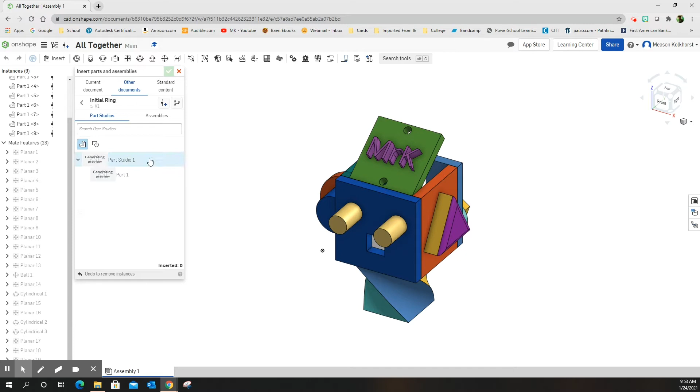Right, we're going to put the ring around our initials. So insert other, my Onshape, fancy cube, initial ring. Create a new version, create.

Part Studio 1, and set him down out there. Green check mark. Okay, so the reason that we left a flat surface on here is so that we could mate it to the flat surface of our top face.

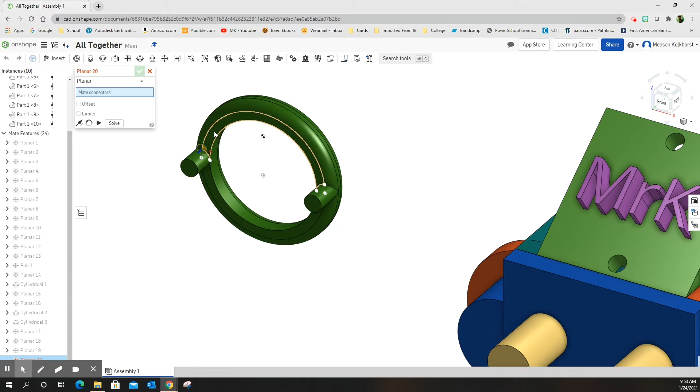So I'm going to do a planar mate, zoom in here, and I want to make sure I get this flat surface. Click. Oops, didn't click. Come on, click. There we go.

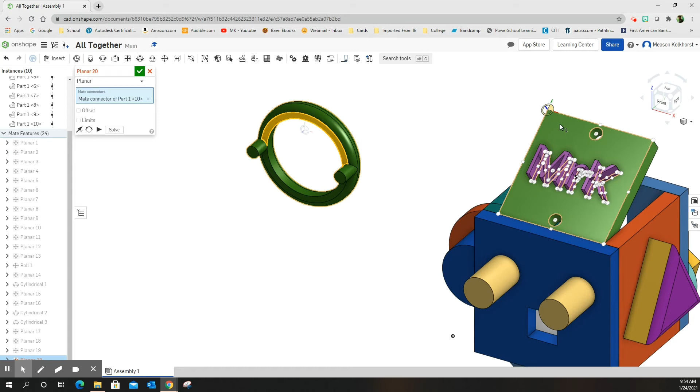And then I'm going to come over here and choose the flat surface of our top face. So I want to make sure, when you're over here doing this, you want to make sure you're not grabbing your initials, otherwise they'll be floating in the air. Check. It's facing the wrong direction, so I'm going to spin it around.

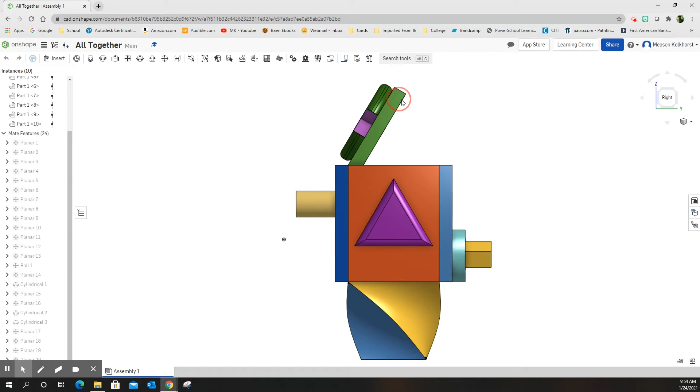Green check mark. Okay, I'm going to move him, but you can see that they're both connected. When I go to the right face, they're always going to be connected because those two faces have been mated together. Oops, turn it around isometric so I can see what I'm doing.

Okay, now I'm going to do a cylindrical mate with our two circles. Oh, look at that. I can grab that back circle without having to turn it around because it's only one surface there. You just want to make sure you're grabbing the right one and not one of the big circles here. We want just that little circle.

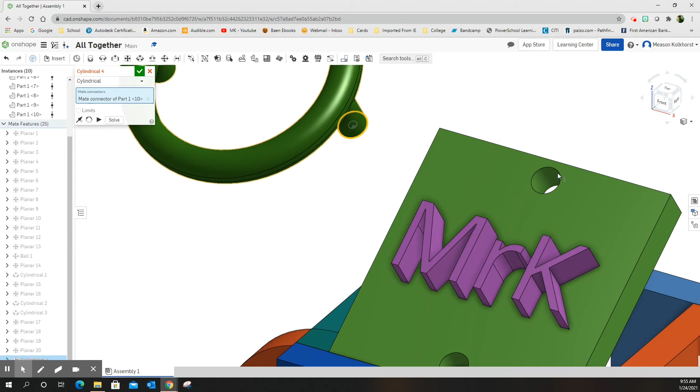Okay, clicking that one, and I want to come over here and, oh, arrow key, let's see. We want the back one, not the center one, we want the back one. There's the center one, there's the top one, we want the back one. Click, and if I spin this and we look, they're lined up the way they should be.

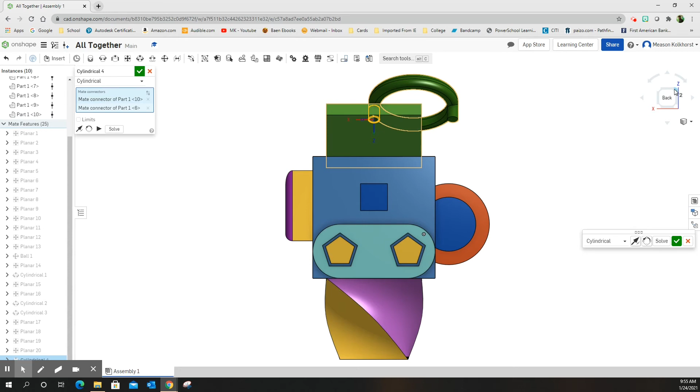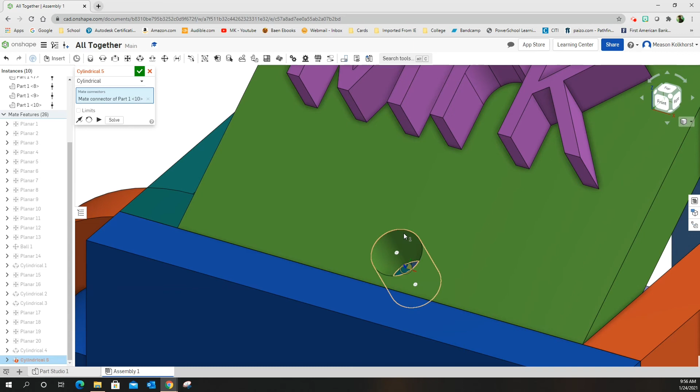So, one more cylindrical mate. We're going to come in here, we're going to choose that cylinder that's on the back there. I'm going to zoom in down here. Remember, it will zoom where your mouse is. And we want, there's my cylinder. I want the back one. Click.

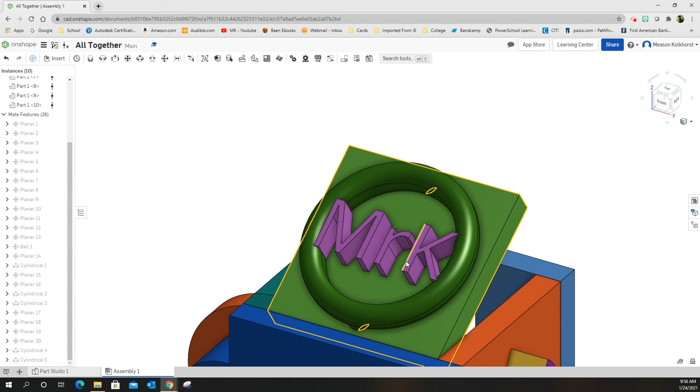And it should line up. And there we go. And look at this craziness. My letters have bumped into my circle. But you know what? That's okay. That just means my capital letters are too big. It's all right, I'm going to let that go. It's okay. So there we go.

Planar mate and two cylindrical mates. Good luck on yours.